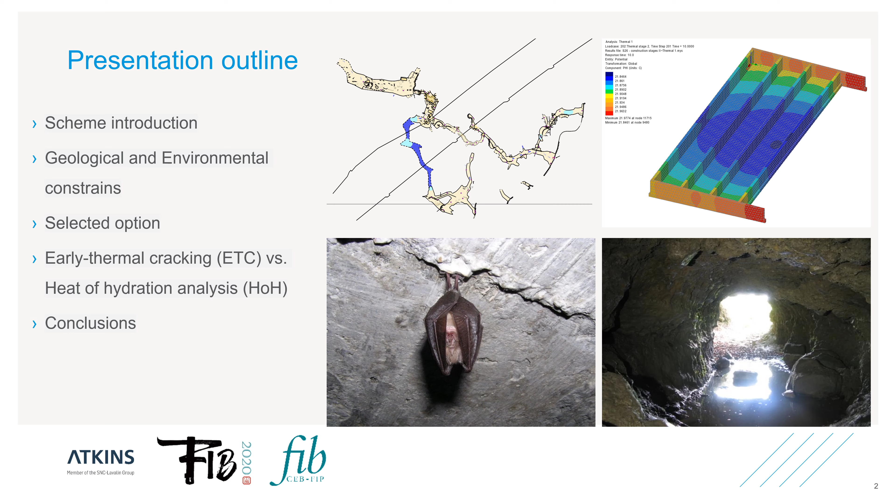The structure is located on the A465 Heads of the Valleys in the heart of Wales, United Kingdom. The A465 forms one of the main east-west highway routes in South Wales. The highway also forms a part of the Trans-European road network. The existing A465 was built in 1964 as a single three-lane carriageway. The existing single carriageway road is being widened through the Clydach Gorge, part of the Brecon Beacons National Park.

Due to the local topographical constraints, the road had to be widened over the Carboniferous limestone caves Ogof Gelynnen and Ogof Capel. The topography of the ground has created a steeply sloping embayment feature known as the divot at the cave entrance. Therefore, we call the structure the divot. An extensive cave system is close to the road surface. The caves accommodate natural bat habitat that must be protected and not disturbed.

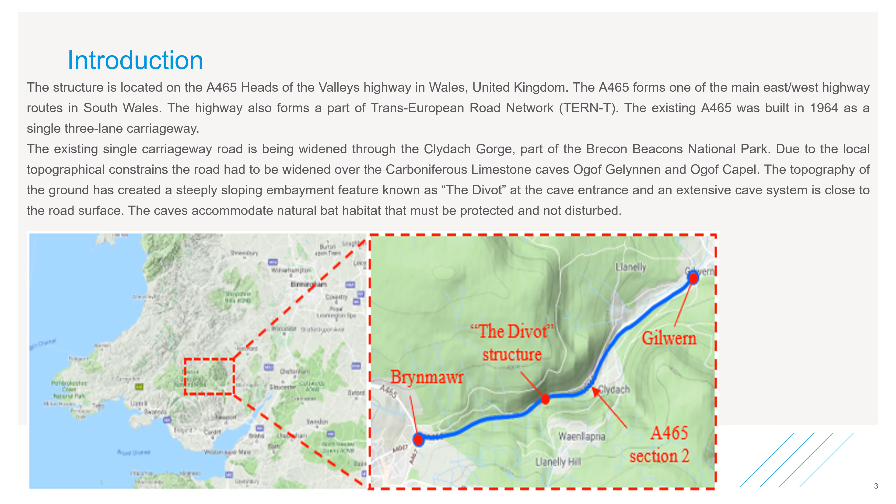The discussed A465 section is being referred to as Section 2, and as mentioned is a widening scheme where a single three-lane carriageway is being widened to dual carriageway. Costain was awarded the Section 2 contract by the Welsh Government in 2011, supported by a design joint venture formed by Atkins and CH2M Hill, which was in the meantime acquired by Jacobs.

Construction of Section 2 commenced in 2014 and is due to be completed in 2020. The overall project cost of the contract is estimated to be £336 million. The chosen procurement route was early contractor involvement with the design and build phase carried out under the NEC3 Engineering and Construction Contract Option C. Here on the slide you can see several photos from construction.

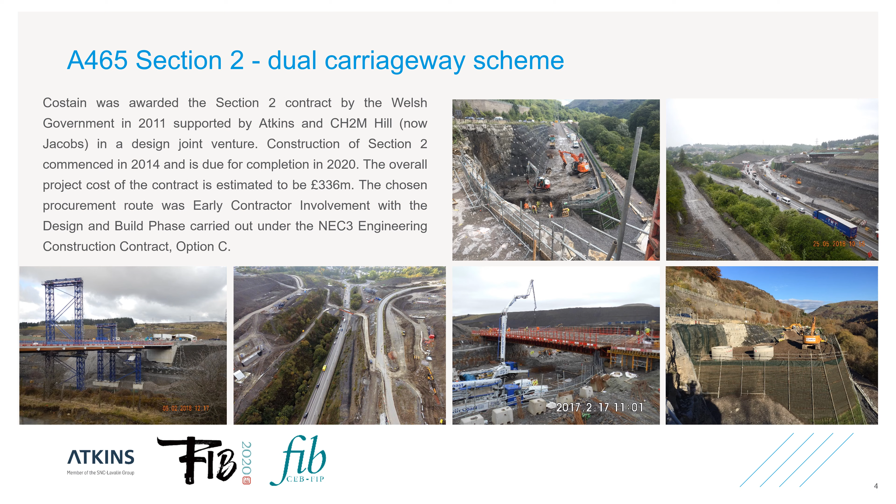Now let's talk about environmental constraints of the scheme. Section 2 is one of the most environmentally challenging schemes in Wales. The section includes a total of 40 statutory designated sites within 10 km of the route corridor, 23 sites of special scientific interest, 3 national nature reserves, 9 local nature reserves, and 5 are the European designated Usk Bat Sites Special Area of Conservation. The identified key issues along the route corridor were the effects on the lesser horseshoe bat population and the habitat known as Tilio-Acerion woodland.

On the left side of the slide you can see a plan view of the existing A465 shown by the gray lines representing carriageway boundaries as it crosses the cave system underneath. And on the right side of your screen you can see a few photos taken from the caves and one of the hibernating bats.

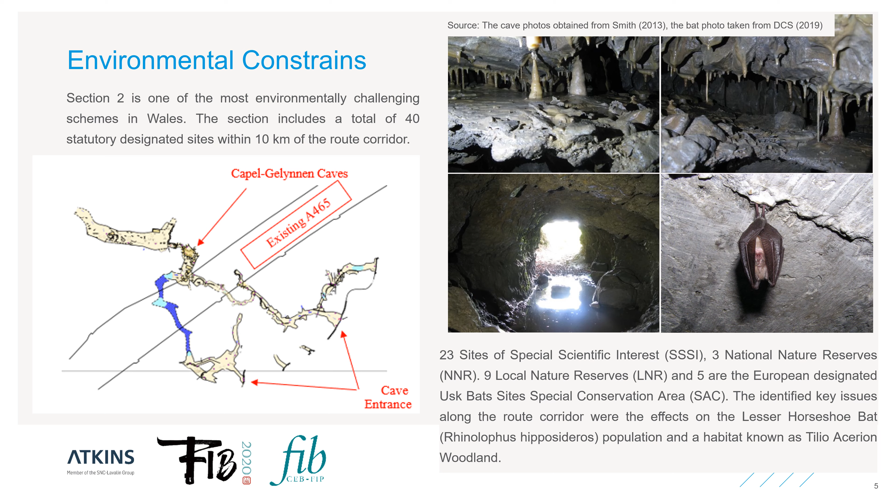It's not just the environmental constraints which are making this scheme difficult, it's also its geomorphology. The project has been assessed as geotechnical category 3 as it involves very large, unusual and complex geotechnical activities, earthworks and structures, and those involving abnormal geotechnical risks together with unusual and exceptionally difficult ground conditions. The historical and geological maps show that the area of the Clydach Gorge is underlain by strata of the Carboniferous limestone supergroup, which have been extensively quarried for limestone.

Ogof Gelynen at this location is formed in consolidated stone and clay. There may be no competent rock between the roof and the surface. Vertical fractures in the roof of the caves are likely extending to the surface, with water ingress obvious during wet periods. The current alignment of the A465 at this location is underlain by engineered fill comprising glacial till derived material which overlies limestones of the Clydach Valley group.

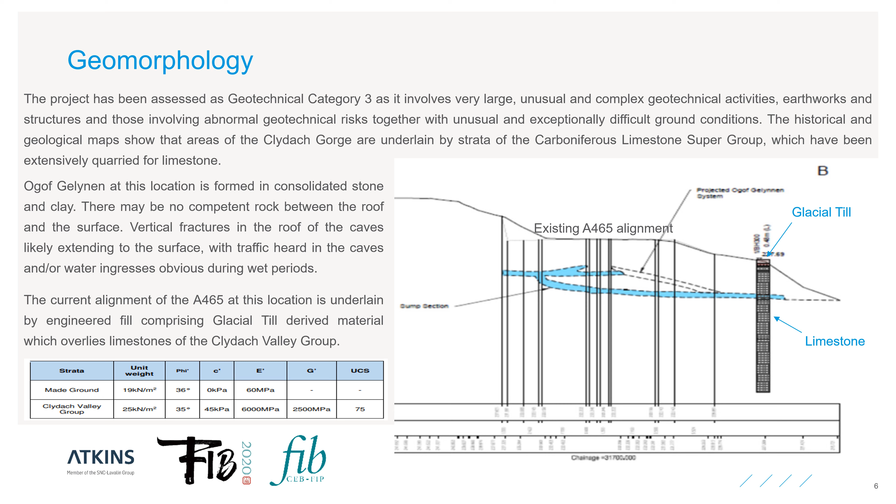On the right side of the slide you can see the geological profile with respect to the existing A465 alignment and caves elevation shown by blue color. Geological material properties are summarized in the table under the text.

As said before, the divot refers to a steep geological embayment located at the westbound carriageway. At this location, the terrain is not wide enough to accommodate the widened A465 carriageway. To accommodate the verge of the westbound carriageway, a structure has to be built.

Several options were considered. The first option assumed building a retaining wall on the geological feature, backfilling the wall, and building the remaining part of the carriageway on top of it. However, this solution would introduce additional pressure on the cave roofs due to increased depth and traffic loads.

Another option considered was to span the divot with a bridge. This solution would require piles boring to the rock and large maintenance costs. The third option considered was to build a multi-cellular concrete structure which is light and requires low maintenance. A cantilever attached to the side of the structure is wide enough to accommodate the new alignment.

This solution does not impart any additional dead load above the caves, as it is lighter than the excavated material, and along with additional live loads over the new carriageway width, the load is not greater than that on the existing carriageway.

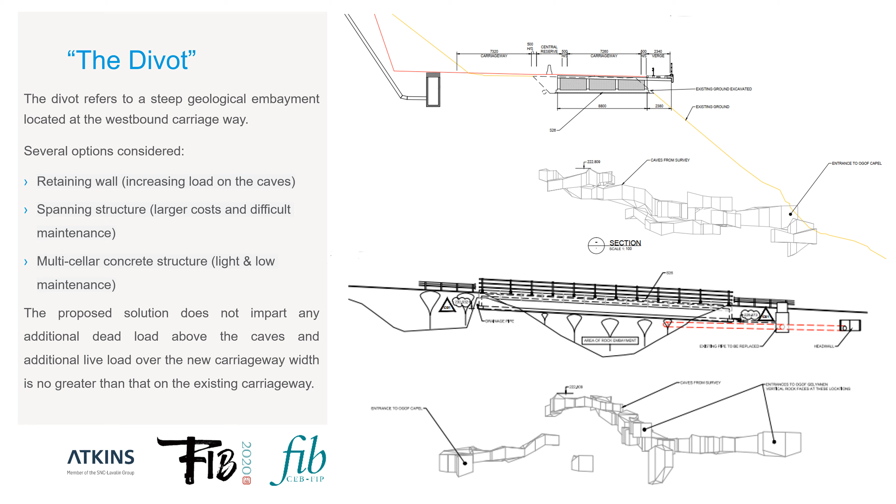The light and low maintenance structure was proposed as a voided slab of a rectangular footprint with 3 chambers and a cantilever edge to accommodate the widened carriageway. The overall length of the structure is 24 meters to bridge the cave system and allow ground bearing at a safe distance beyond the caves. The structure has a longitudinal gradient of 5%.

The overall width of the structure is 11.3 meters. It carries the westbound carriageway, including a part of the central reserve. At the edge of the cantilever, it is proposed to have a concrete steel precast parapet.

The voids are 2.6 meters wide and divided by concrete walls 250 mm thick. The top and bottom slabs are both 250 mm thick as well. The voids were proposed to be filled with extruded polystyrene, which provides lost formwork for the top slab concrete.

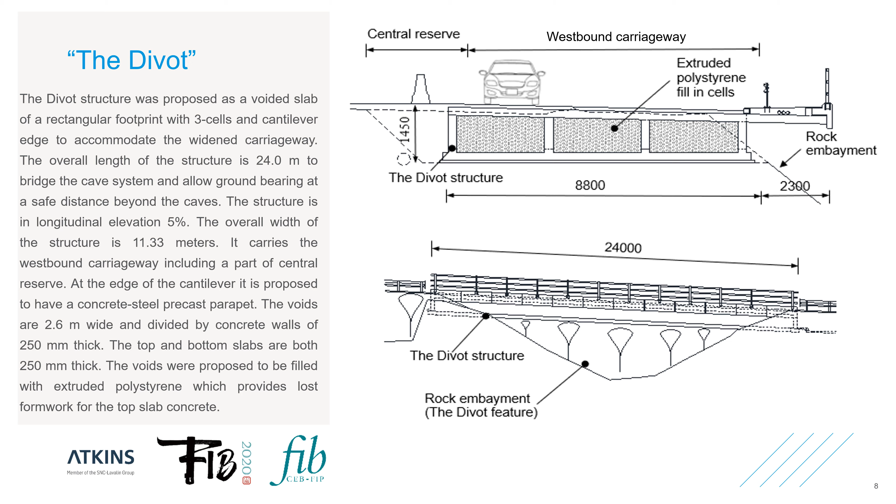As this is a buried structure, the majority of the concrete surfaces are in permanent contact with the surrounding soil and ground moisture. The structure was therefore designed to prevent concrete cracking due to early thermal actions related to cement hydration as a measure of controlling water ingress and improving durability. The reinforcement spacing was designed with respect to concrete early age thermal cracking.

To refine the early thermal strains calculation, a 3D FE model was developed for heat of hydration distribution analysis. The analysis considered the assumptions related to specified casting and curing requirements. A specific concrete mix design and 3 construction stages, each lasting for 5 days, were considered.

Based on these assumptions, it was possible to analyze heat of hydration distribution across the structure after pouring and during concrete hardening up to the time when the temperature was uniform in the whole structure. Ambient ground and air temperature was assumed to be 21 degrees Celsius.

Material properties such as convection heat transfer coefficient, radiation heat transfer coefficient, thermal conductivity, and volumetric heat capacity were set to default values for concrete. Exothermic behavior properties, weight of cement per unit volume, water to cement ratio, and cure temperature were set in accordance with CIRIA C660 calculation.

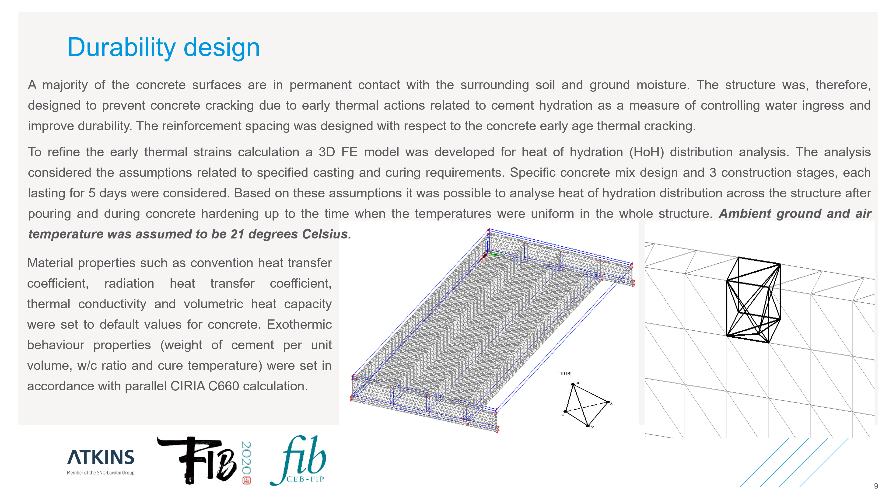The figure shows the volume FE model developed for heat of hydration analysis. Each concrete member was modeled as a 3D volume and meshed with tetrahedral elements. This slide presents results obtained from the HOH analysis. The contour maps present temperature developing in each member in time, and corresponding stresses and strains.

The first construction stage considered bottom slab pouring and hardening and lasted for 5 days. The results demonstrate heat propagation at the center of the slab. Maximum temperature was achieved after 12 hours. After 5 days, the slab achieved the temperature corresponding to its surroundings.

In the second stage, the walls were poured. The temperature achieved its maximum after the same time as the bottom slab in the previous stage. The contours show how the heat was transferred from the walls to the bottom slab. After 5 days, the walls naturally cooled down to the ambient temperature level.

The last stage represents top slab pouring. The time scale for achieving maximum temperature and consequent cooling corresponded to the previous stages. Remarkably, the contours show maximum temperature developed in the cantilever, from which the heat was transferred down to the supporting members.

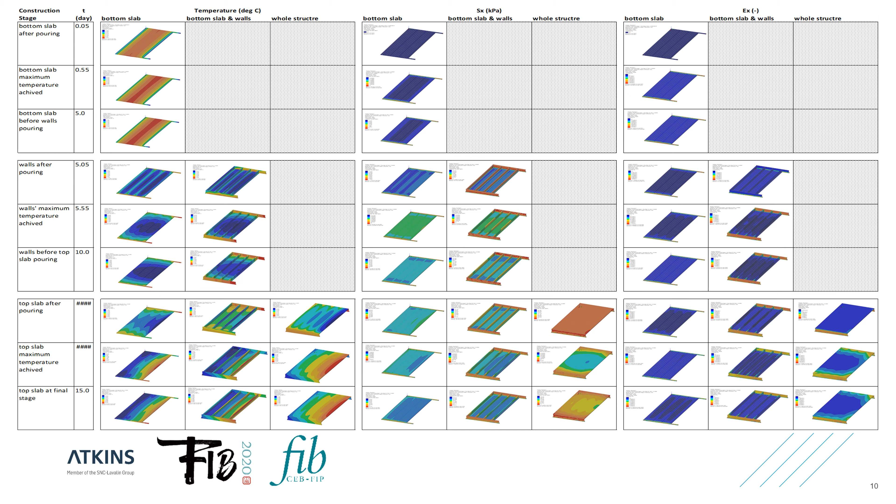This table summarizes maximum temperatures, compressive and tensile stresses, and strains in each construction stage. The table can be found in the published paper. The results will be discussed in the following slide.

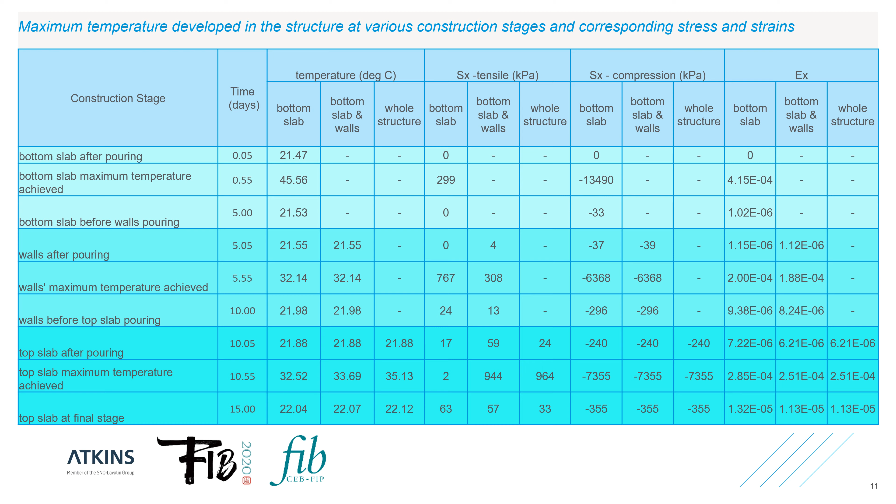The HOH analysis showed that the maximum temperature achieved in the bottom slab is 45.6 degrees Celsius. This is probably due to different boundary conditions at the top and bottom face of the base slab, while the bottom face is in permanent contact with soil with different thermal conductive properties. The top face is exposed to air.

The maximum temperature achieved in all other members varies between 32 to 35 degrees. The other members are exposed either to air at both dominant faces or to air at one face and to polystyrene at the other. The temperature difference delta T is equal to 24.6 degrees Celsius and 11 to 14 degrees respectively. The maximum tensile stress achieved in concrete was up to 1 megapascal located in the top slab.

The stress level below concrete tensile strength suggests that the crack will not be developed due to heat of cement hydration. Following the design principles according to CIRIA with the same concrete properties and boundary conditions, the differential temperature delta T used for calculation was 30 degrees Celsius. The results obtained from the calculations suggest cracking of the top slab with minimum 530 mm² required reinforcement area per face.

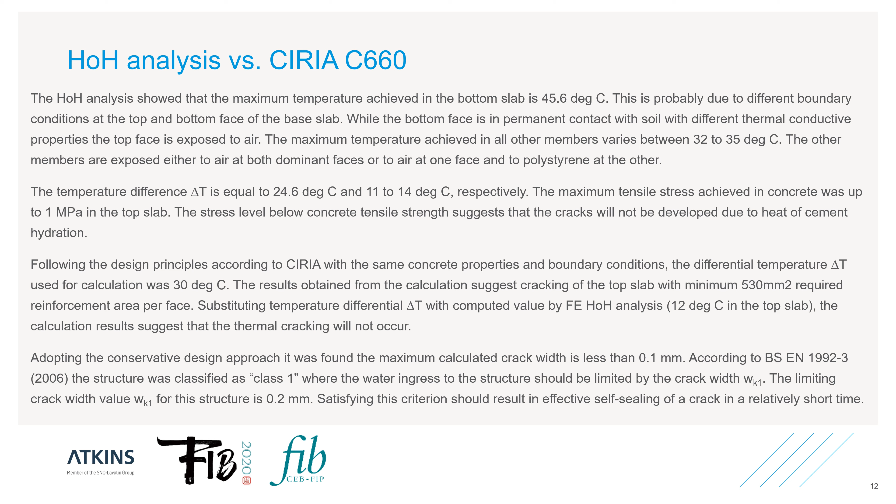Substituting temperature differential delta T with computed value by FE HOH analysis, the calculation results suggest that thermal cracking will not occur. Adopting the conservative design approach, it was found that the maximum calculated crack width is less than 0.1 mm. According to Eurocode 2 Part 3, the structure was classified as Class 1, where the water ingress to the structure should be limited by the crack width WK1. The limiting crack width value WK1 for this structure is 0.2 mm. Satisfying this criterion should result in effective self-sealing of a crack in relatively short time.

The summary of remarks will be presented. The HOH analysis has shown that the maximum differential temperature achieved is less than the value obtained according to CIRIA C660. This suggests the early thermal crack calculation is more conservative than the FE HOH analysis. Consequently, the crack width and spacing according to CIRIA C660 is greater, since the HOH analysis had shown the stress lower than concrete tensile strength.

The maximum hydration heat was achieved circa 12 hours after pouring. After 5 days, the concrete temperature was corresponding to external temperature. CIRIA C660 does not provide temperature difference for polystyrene formwork, however provides value of thermal conductance for polystyrene formwork, which can be set in FE HOH analysis.

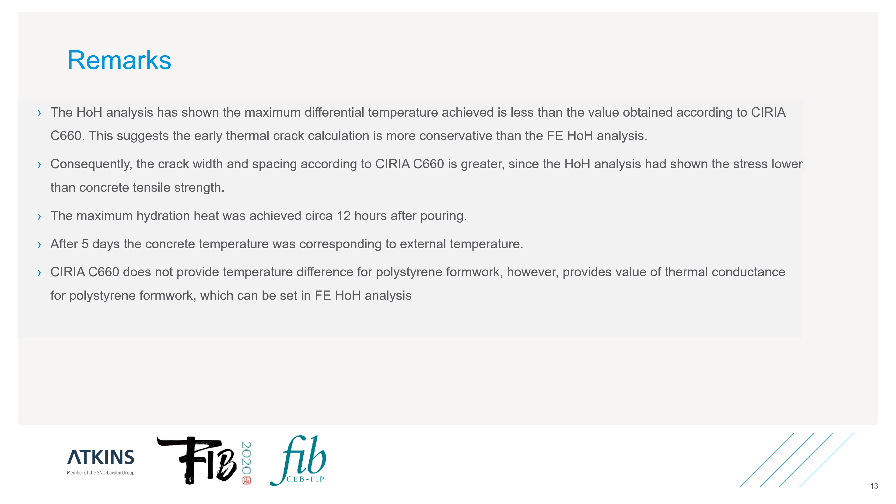Even though the Divot structure may appear as a simple construction, its design is a careful balance between significant environmental and geological constraints and minimizing construction costs and risks. The structure was designed to protect the natural bat habitat from collapse due to the potential increased traffic surcharge above the caves. The design of the structure was also carried out with respect to minimizing maintenance requirements. Close attention to the detail and producing a simple reinforcement arrangement will prevent excessive cracking and enhance durability of the structure for its design lifetime of 120 years.

It should be said that CIRIA C660 was in the meantime superseded by CIRIA C766 and the calculated results need to be verified against the latest calculation approach. However, current experience with CIRIA C766 suggests minimum impact on the results. The results were achieved for concrete structure with relatively slender members. Therefore, further investigation of more stocky concrete members is recommended.